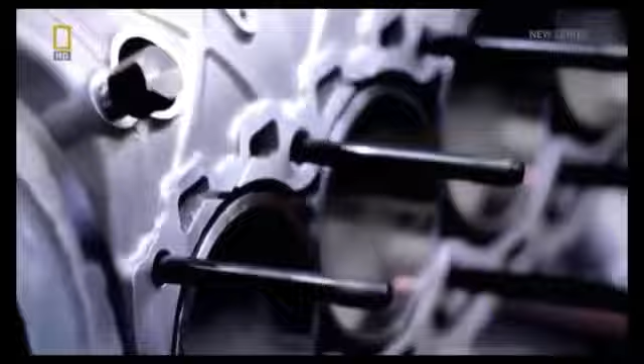The raging bull of Lamborghini has been a symbol of extreme car design and engineering for almost 50 years. But today, as a new age of supercars dawns, the Italian manufacturer has set itself its most ambitious goal yet: to blow its competitors out of the water by creating the best super sports car the world has ever seen, a game-changing vehicle that will alter the scope of supercar design for good.

But this will be no simple reworking of Lamborghini's old flagship models. Its engineers and designers are given the task of starting with a completely clean slate. And at its mega factory in northern Italy, the Lamborghini team has been stretched to its limits to fulfill those expectations. Now, as its latest creation takes to the road, it will be seen if the high-risk strategy has paid off.

Lamborghini has been responsible for some of the world's most iconic sports cars of the past half-century: 350 GT, Miura, Countach, Diablo. The brand has achieved global recognition for its no-holds-barred approach to automotive engineering. Its extreme and powerful machines have placed it among the supercar manufacturing elite for decades.

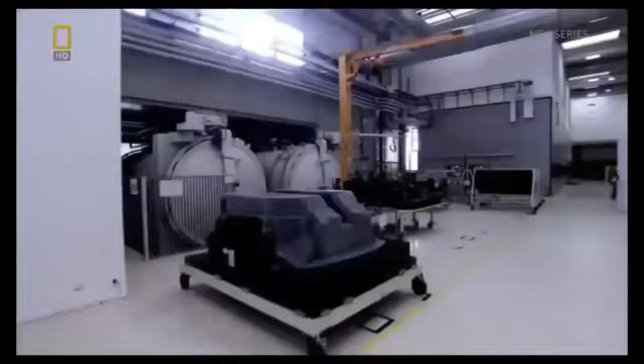Stephan Winkelmann has laid out his vision in a manifesto for the future of the supercar. Now, in our days, it's much more important to speak about the power-to-weight ratio, so the balance between the power of the car and the weight of the car. And for us, in the future, it's much more important to reduce the weight because you get a better feeling, a better driving experience. The Aventador is the first test of this new blueprint.

And the National Geographic channel has been given unique access at the Lamborghini factory to witness the creation of some of the car's first incarnations.

This is Sant'Agata Bolognese, a typically picturesque town in the heart of Italy's Emilia-Romagna district. But it is in fact anything but typical, as it's home to Lamborghini, one of the world's most renowned supercar manufacturers.

The factory is situated in the heart of what is known as Motor Valley in northern Italy. Sant'Agata is intrinsically linked to Lamborghini's success, according to its head of communications, Raffaello Porro. Everybody in the world recognizes our cars come from Sant'Agata Bolognese. And so our factory is a kind of temple where people come, they can say it's a pilgrimage, to visit where those cars come from.

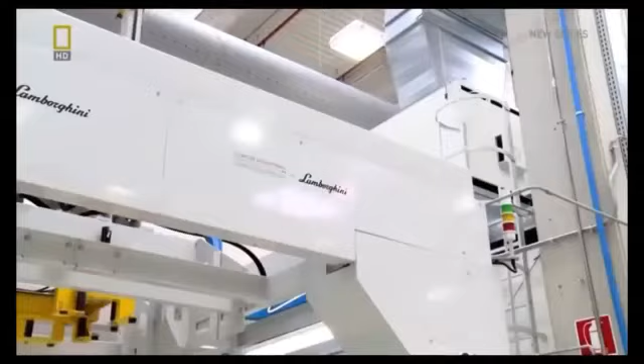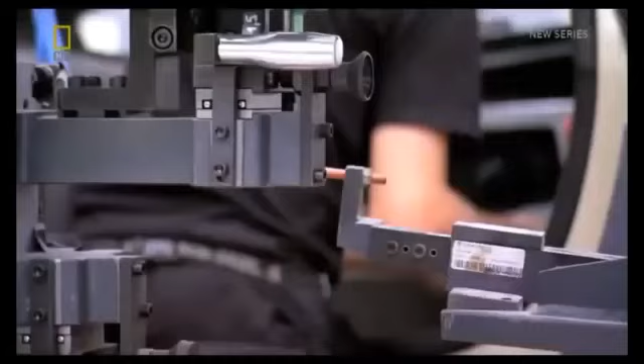The factory has seen many changes over the years, but its purpose has never wavered: to produce vehicles that challenge the status quo. And a largely local workforce is a vital part of that ethos.

They're coming from this region, not even from the region, they're coming from this part of Emilia. We are in Emilia-Romagna, it's the Motor Valley, and this is in Emilia. So a lot of our people are not only living here, they were born here, they are here since generations, and a lot of workers we have in our factory, in our plant, are here at the second generation.

These people are Lamborghini's lifeblood, over 400 individuals working with a singular aim, to produce high-end vehicles that consistently capture the public's imagination.

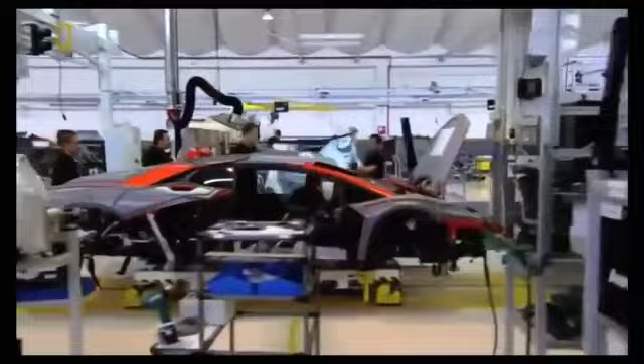In the last couple of decades, a new breed of creative and high-tech vehicle specialists has emerged. Companies such as Pagani and Koenigsegg have set their sights on toppling the most revered names in supercar engineering. Names like Lamborghini.

But it's unlikely that this Italian giant will let its mantle fall without putting up a fight. An attitude embodied in the company's emblem, the Raging Bull, partly inspired by the bravery of Spain's legendary fighting bulls, one of which showed such fearlessness in battle that it was awarded a trophy for its courage in 1993. Its name was Aventador, and almost 20 years later, its legacy lives on in Lamborghini's latest model.

It's Aventador's battling spirit that Lamborghini's development team must channel. In 2007, they're faced with the daunting task of creating a supercar that sets the standard for all others. Maurizio Reggiani, head of research and development, realizes that the only way of doing so is to take a step into the unknown.

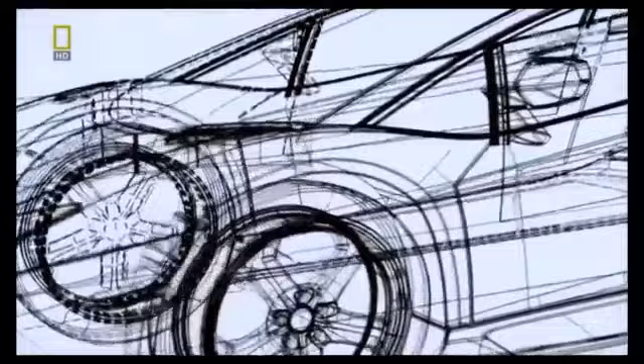To start from a completely clean slate is extremely high risk, and it's up to Reggiani to convince the board that it's the right thing to do. This was one of the hardest things, because the project we were presenting had nothing in common with the old Murcielago, not with anything that existed in production at all. So it really meant beginning from scratch, with all the risks that come with that.

But the board decides the risk is worth taking. At the end of the day, they understood very well, because this is, again, about what Lamborghini is all about: to recreate and to be always revolutionary in the approach.

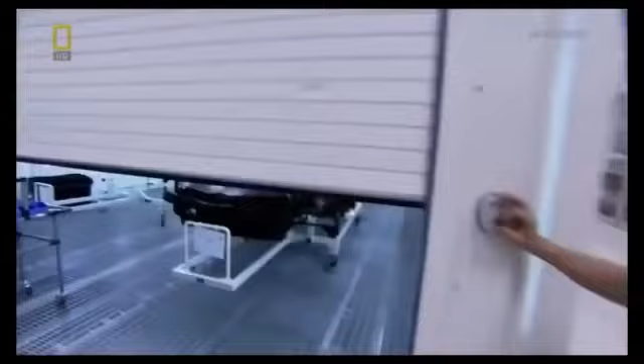The spirit of innovation is apparent in every fiber of the Aventador, as Lamborghini know that the fight to stay at the top won't be won through half measures. And nowhere is that combative approach more apparent than in their focus on lightweight construction, which they've taken to new levels with an entirely new concept for road cars.

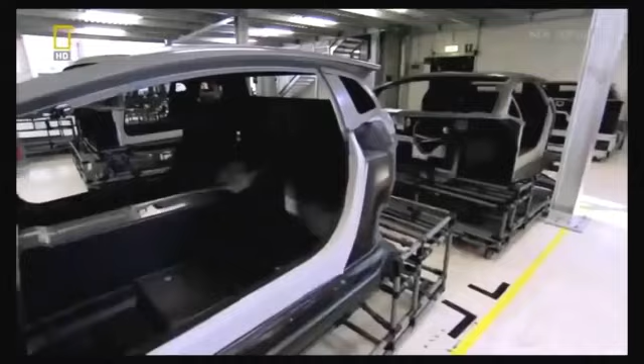A full carbon fiber monocoque. These structures are common in racing cars, but the high cost of materials and laborious production methods have made them unavailable to supercar manufacturers, who've had to combine carbon fiber with cheaper, heavier elements, such as aluminium. That is, until now.

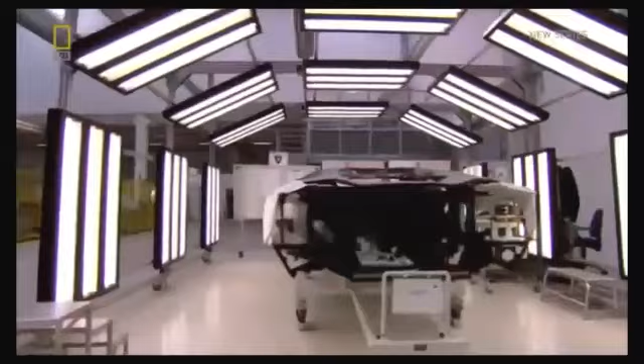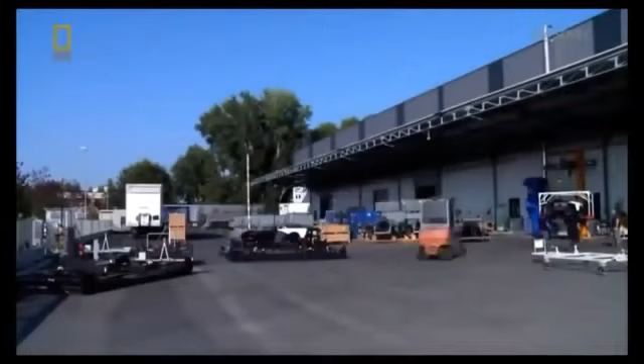The development team has devised a method that allows this race car technology to be mass-produced. But it requires a specialist facility that's up to the task. So in 2009, they build a whole new megafactory just down the road from the company headquarters, devoted to constructing the Aventador's unique carbon fiber body.

Being just 147.5 kilograms, this helps make the Aventador significantly lighter than the Murcielago, considerably improving the all-important power-to-weight ratio, and in turn, the handling.

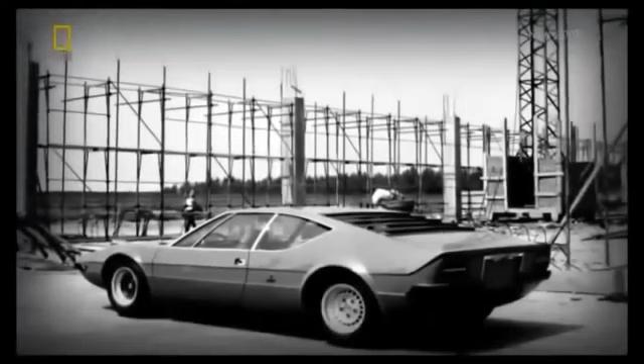Lamborghini hopes that this innovation will stave off the threat by the new wave of rival companies. Lamborghini knows well what it's like to be the cocky young upstart, vying to unsettle the established names, as that's how it began almost 50 years ago.

The man upsetting the status quo back then was the company's founder, Ferruccio Lamborghini. He had made a fortune from a tractor manufacturing business and used some of his money to satisfy his love of sports cars.

According to Lamborghini legend, when he went to Ferrari to critique some of their parts, his views were dismissed. He got a negative response out of some requests he had and proposals to make a better car. And so he said, I will found my own company and I will create the best super sports cars ever.

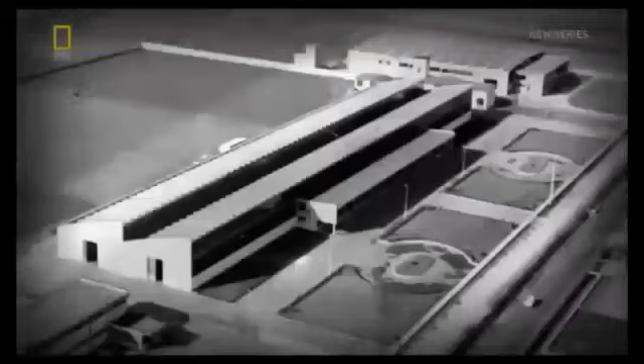He established Automobili Lamborghini in 1963, and for the next few years he toiled furiously to achieve his goal. The cars he created were well received, but it wasn't until the launch of the iconic Miura in 1966 that Lamborghini really made its mark. The tractor maker had succeeded in breaking into the exclusive world of supercars with his bold new enterprise.

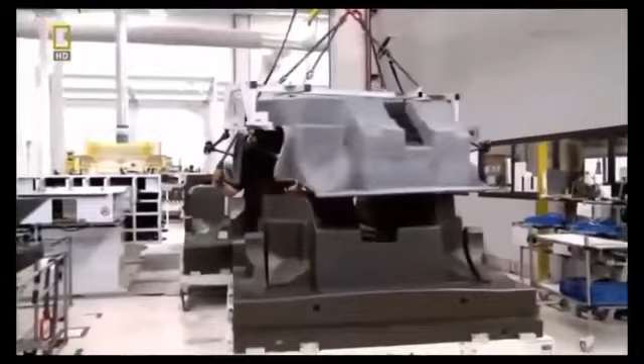Almost 50 years later, despite having joined the ranks of well-established sports car manufacturers, the company still strives to be edgy and uncompromising. As demonstrated by its approach to the area it believes will define the future of sports car engineering: lightweight carbon fiber construction.

The company's relationship with carbon fiber goes back as early as the 1980s, when it created the Countach Evoluzione, a concept car which experimented with the use of composite materials.

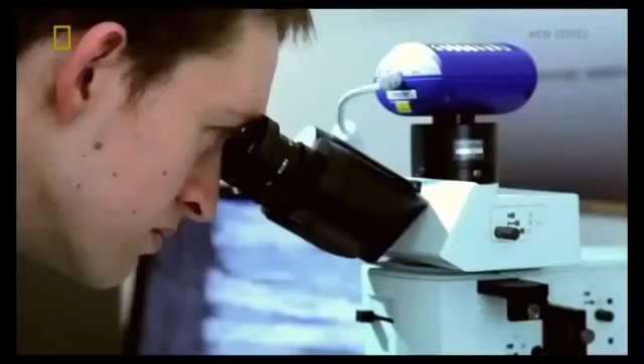It was dreamt up by the newly formed Composites Department, whose successor has made many inroads into research and development of lightweight composite materials. And discoveries made here mean that next door, the company has been able to construct its new carbon fiber production facility.

The man given this task in 2009 is Ranieri Niccoli, Industrial Director. And he must devise it completely from scratch.

So, when we design and we build this factory, we didn't have any automotive benchmark. We were the only one in the automotive business to build and to run this kind of technology.

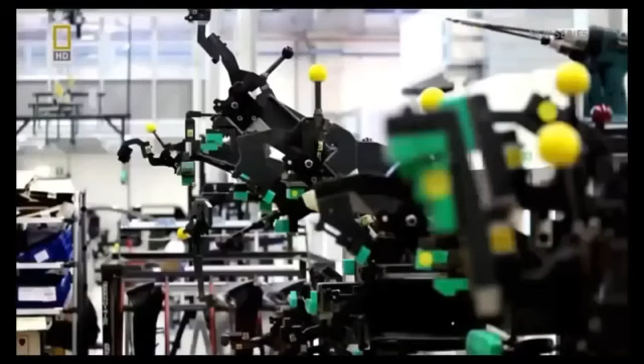So they have to look elsewhere for inspiration. So we look to other sectors, for example, the aeronautic sector, then we adapt and we modify their process to a Lamborghini production system in order to build our car.

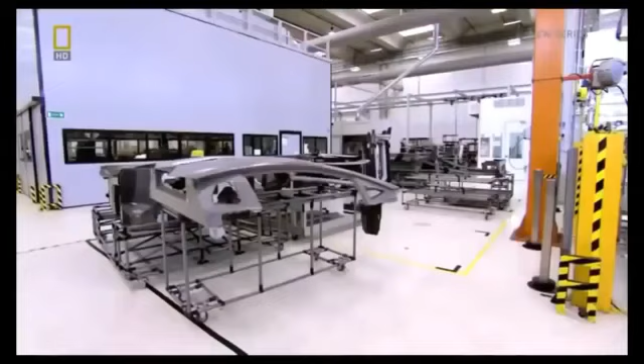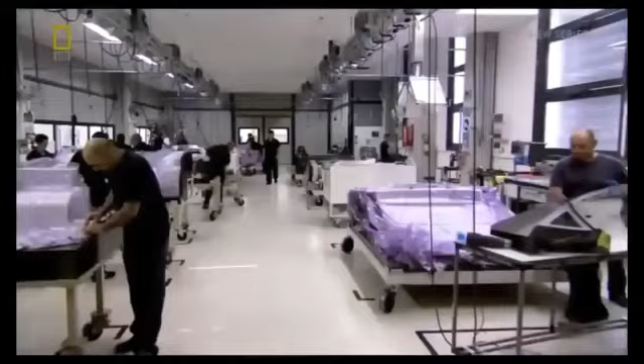The result is 500 square meters of new production space, known as the CFK, devoted entirely to sculpting the Aventador's super lightweight monocoque. Here, 146 carbon fiber specialists toil day and night to create 4 complete monocoques every 24 hours.

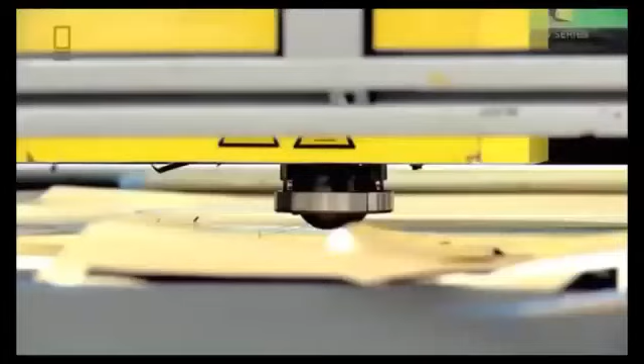To achieve this target, engineers have developed a unique production system. All materials are first cut by an automated machine before being sent for preparation. The material is placed into molds and laminated in a vacuum bagging process which forces the layers into shape, before being cured in a large pressurized oven known as an autoclave.

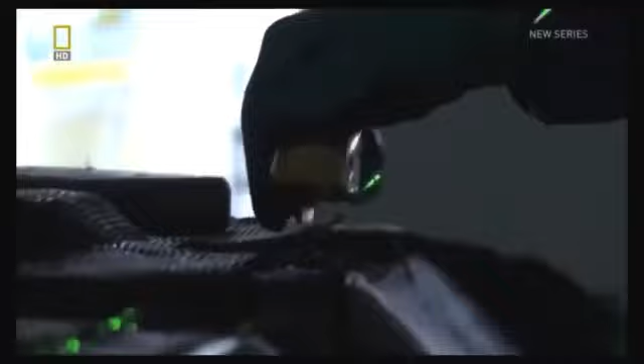Meanwhile, the production of other parts of the monocoque is underway, as operators fine-tune and cut more layers of carbon fiber with the assistance of precision lasers. A special oven is used to inject resin into the carbon fiber mats, which transforms them from soft sheets of cloth-like material to a strong, rigid structure.

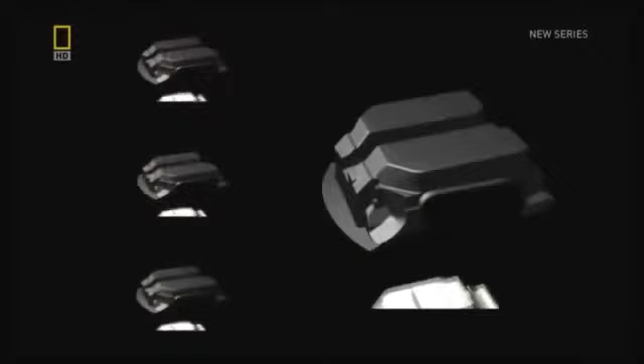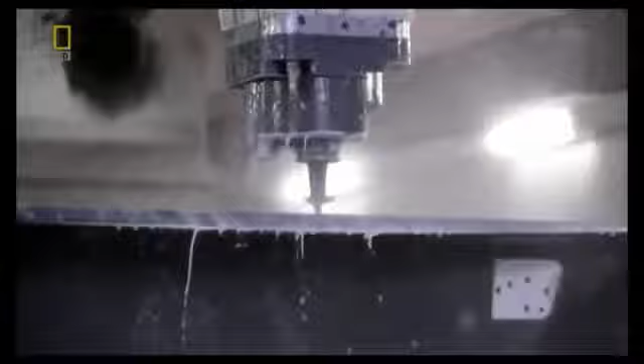After all these processes are over, the two key sections are finally recognizable: the base section, known as the tub, and the roof. They're placed in an automated machine, which drills them with holes allowing for attachments to be made later.

Throughout the factory, computer-controlled machines share tasks with human specialists, a partnership that's integral to the Lamborghini production process.

The main priority of our plant was to follow the Lamborghini production system, so with a high degree of craftsmanship, high degree of skill, people, combined with a technology, with automatization process. This was the main challenge that you can also see in our plant.

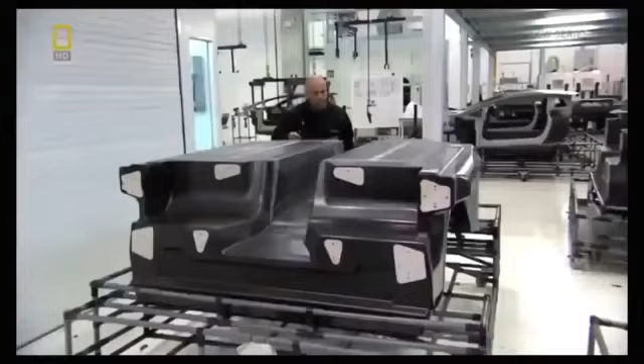Aeronautic-inspired engineering is ingrained in many aspects of the Lamborghini CFK production process, such as this stage, known as the Harmony Hammer Test. In this quality control test, an operator strikes the monocoque section with a specially designed hammer and allows it to vibrate, listening out for areas where air might be trapped in the carbon fiber shell.

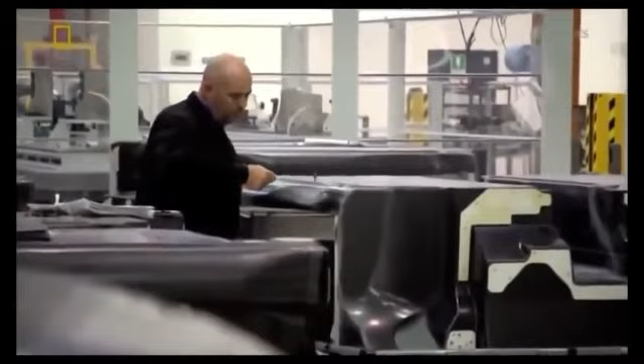Once checked, the parts are ready for their union as the tub and roof are glued together, turning the monocoque into a single entity. It's essential that the two parts of the monocoque are exactly aligned, so workers use a robotic arm with a 3D laser attachment to check that the sections have been coupled correctly.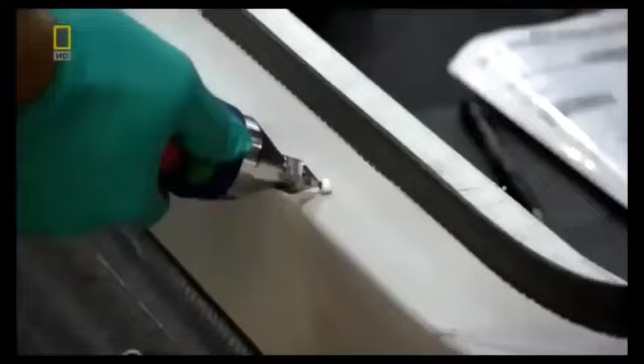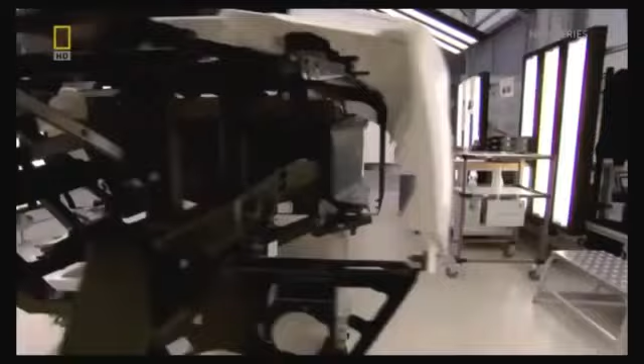Once the correct dimensions are confirmed, metal sections are manually attached to the monocoque and the body is complete. Then it's into a light tunnel where surfaces are quality checked to ensure they're in pristine condition before the Aventador's body is signed off for release.

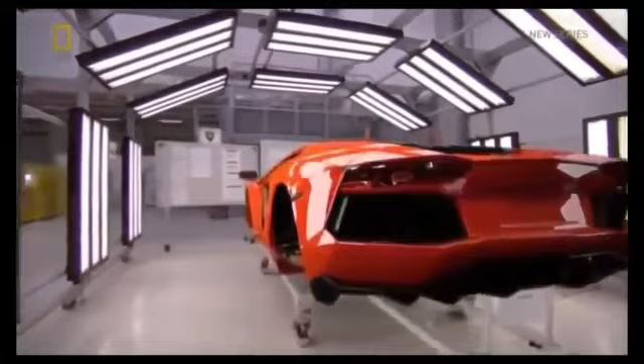As the body is ready to leave the carbon fiber plant, it's possible for the first time to see the Aventador's unique geometry taking shape. This extreme design is one of the most recognizable aspects of the Lamborghini DNA, and it's a tradition maintained and pushed forward here, at Lamborghini's design center, or Centro Stile.

The generational leap required of the Aventador does not stop with its engineering capabilities. The look of the car is integral to its ambition.

The design of Lamborghini always has to be revolutionary. Yes, you have to understand, if you see a car in front of you, this can only be a Lamborghini even if you don't know the model. So it's very tough for our designers because they have to create something new, but recognizable at the same time.

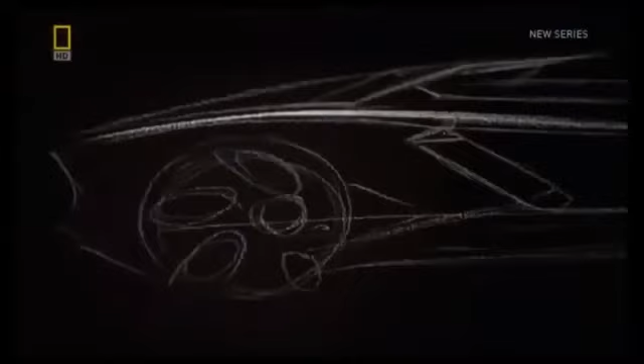The job of the design team and its chief, Filippo Perini, is made even tougher during the earliest phase of the Aventador's development, when the board forces them to compete with outside companies to earn the right to design the new model.

And at one point, victory comes close to slipping through their fingers.

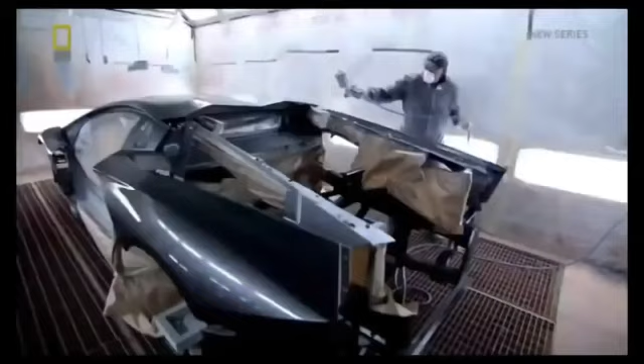After the CFK, it's taken away to be given one of its most important characteristics: its color. Here at the paint shop, it's lavished with the kind of attention that most cars could only dream of.

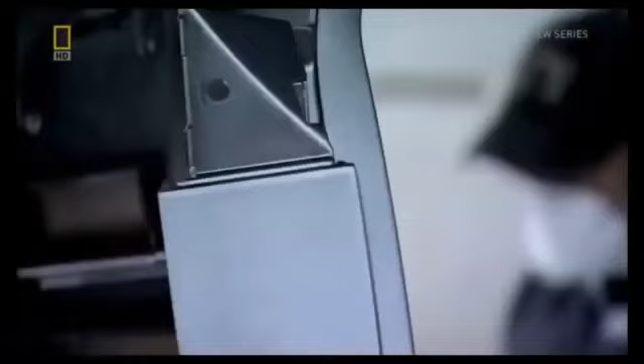One of 13 colors are hand-sprayed over every part of the bodywork. 27 pieces are given individual attention by a specialist, who covers them with 8 liters of paint. The Aventador, with its extreme lines, requires more man-hours than any other Lamborghini in the past.

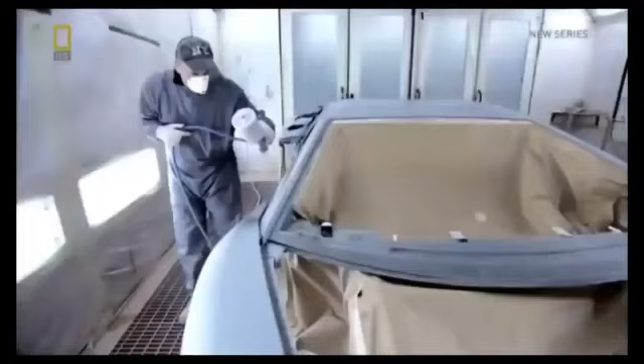And of course, every phase is carried out manually, as only human analysis and dexterity can ensure that each surface is covered with exactly the right amount of paint.

In total, 200 man-hours are spent on every single Aventador while at the paint shop. 3 whole days are spent on polishing alone. After being carefully sanded, the Aventador is repeatedly buffed with special materials.

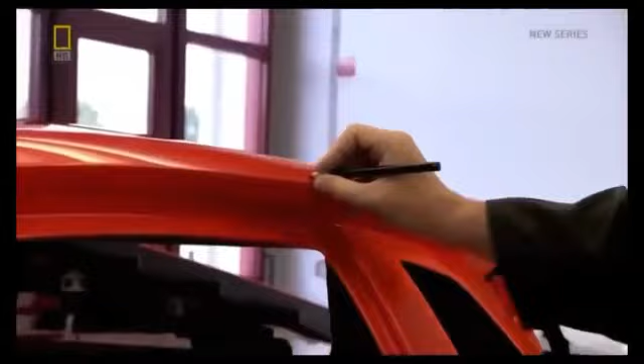After that, it's sent for another quality check in a light tunnel. For 2 hours, an inspector walks around the bodywork, checking for color perfection. If there's any inconsistency, the offending section will be sent back to be repainted.

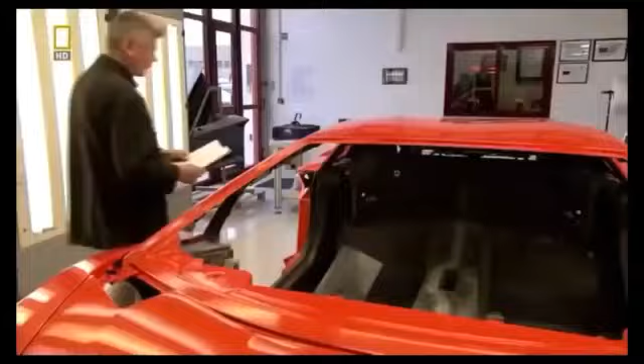Underpolished areas are also marked out for extra attention. These hundreds of hours of devotion end when the exacting standards of the inspector are met, and the car is released for the next phase of production, the assembly line.

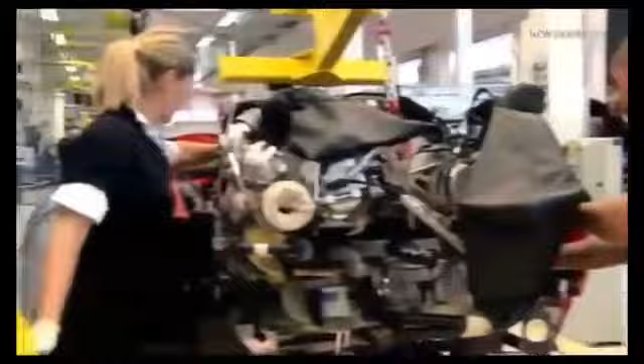The assembly line for the Aventador lies just meters from the original site of the Lamborghini factory, built almost half a century ago. Back then, its founder, Ferruccio Lamborghini, was known for his hands-on approach, frequently seen on the factory floor, directing operations. He focused on the skill of the mechanic as being key to the success of the product, and that attitude still permeates the site today.

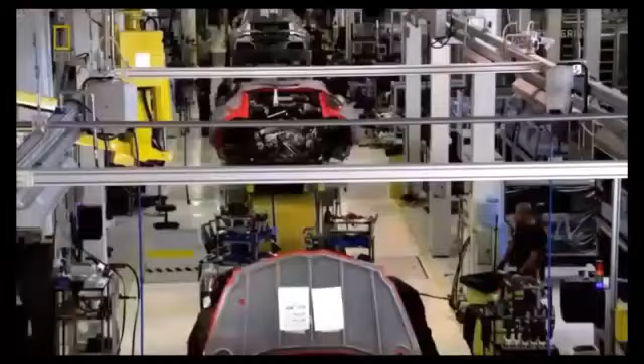Here, 50 workers spread over 11 workstations are responsible for the task of assembling Lamborghini's latest model. The man in charge of making sure things run smoothly is production manager Andrea Costantini. He sees his highly trained workforce as a direct link with the roots of the company.

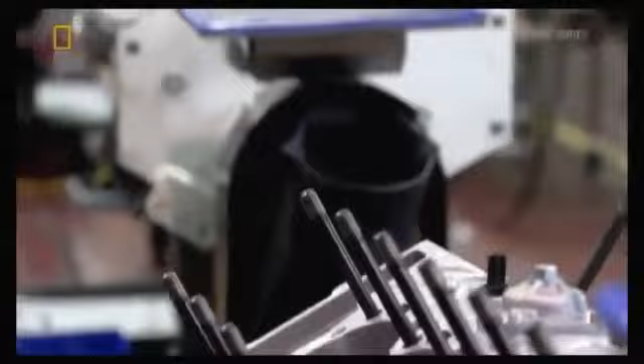In this case, the workers are the most trained. We take these guys directly from the best schools of mechanics in Emilia-Romagna, here, the surroundings of Lamborghini, and we train them for more than 2 years to allow them to be really the best experts on mechanics and engines. So everything is done manually, still like we did since 1963, since when Mr. Ferruccio Lamborghini, the owner of Lamborghini, started.

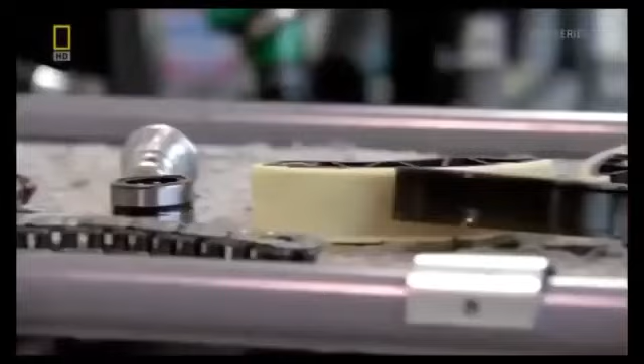In an age when machines dominate production in almost every field of manufacturing, loyalty to the art of skilled manual labor is not often seen. But here it's believed that when it comes to reliability and precision, humans still have the edge over machines.

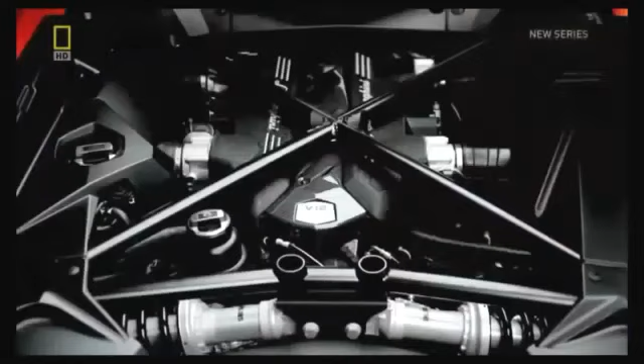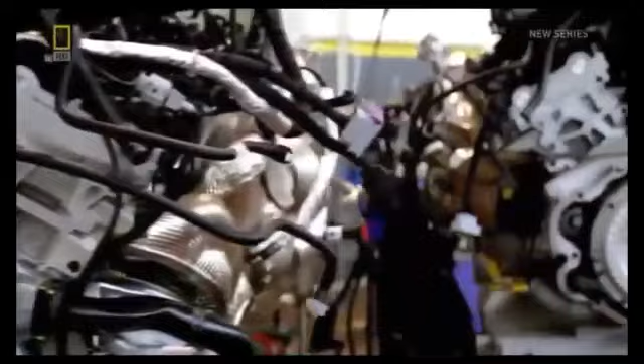And nowhere more so than in the engine assembly station. For this is where the heart of the Aventador is put together, the Lamborghini V12. At a time when many sports car manufacturers are shying away from using the 12-cylinder engine, Lamborghini is resolute. The V12 always has and always will provide the power for their flagship models.

The V12 for Lamborghini is part of our DNA. Everything for us is rooted in our history, which started with the 12-cylinder engine.

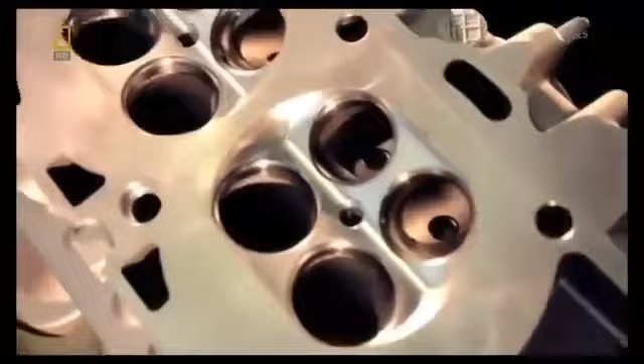With 6.5 litres of displacement and 700 horsepower, the Aventador's V12 is about as gutsy as it gets. But as with everything else, it's had to move with the times. Lightweight, again, is the order of the day. And despite the fact that this engine is more powerful than the Murcielago's, it weighs less, just 235 kilograms, by using aluminium silicon alloy on components such as the crankcase.

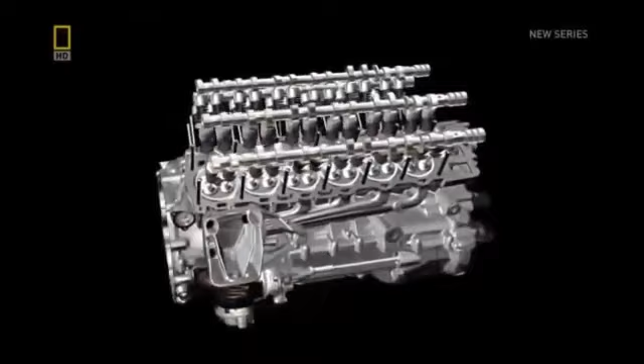The main purpose of the V12 is to power the Aventador, but when linked with the car's exhaust system, it takes on another significant role. Creator of the mighty Lamborghini Orchestra.

The V12 motor represents what for us is the sound, the music of the car, the way in which it's presented to the public, the way she makes herself heard and announces her arrival. To achieve this, we invest a great deal of time in simulations. We simulate the sounds that we can have, and then we experiment first in the lab and then on the vehicle itself.

This 12-cylinder symphony has a full range, from a moderate rumble through the town at low revs to the screaming crescendo of maxed-out gear shifts.

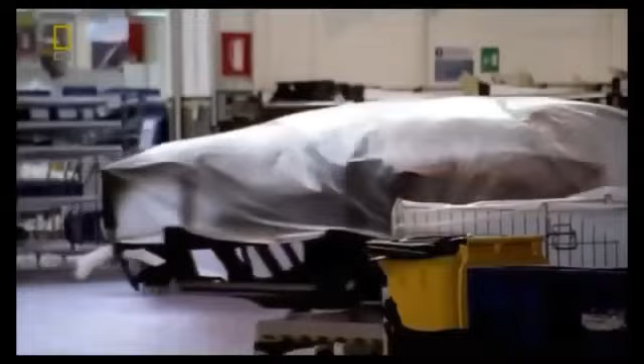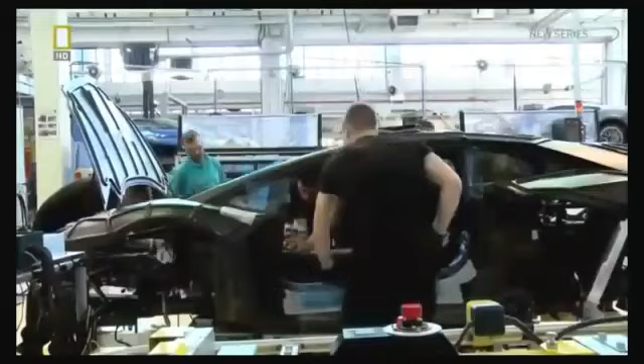While the V12 is being assembled, the body of the Aventador arrives on the assembly line, ready for conversion from an empty shell into a fully functioning supercar. As the company's latest foray in a highly competitive market, the Aventador needs a production process with efficiency to match.

The drive for improved efficiency was for sure coming from the market, from our competitors. We have always to be the best, to be the number one in terms of product, in terms of performance, but also in terms of quality. So to become and to stay number one, we have always to have a huge increase of efficiency, a huge increase of quality in the assembly line and in all the processes inside the factory.

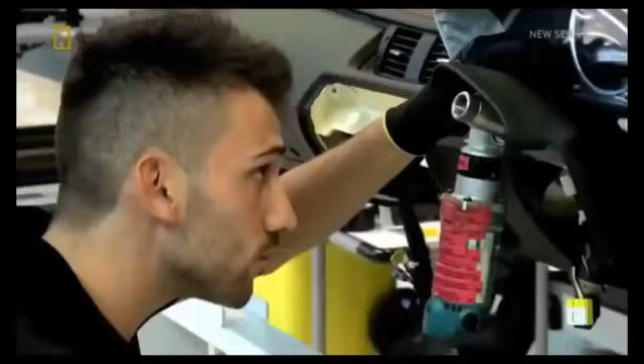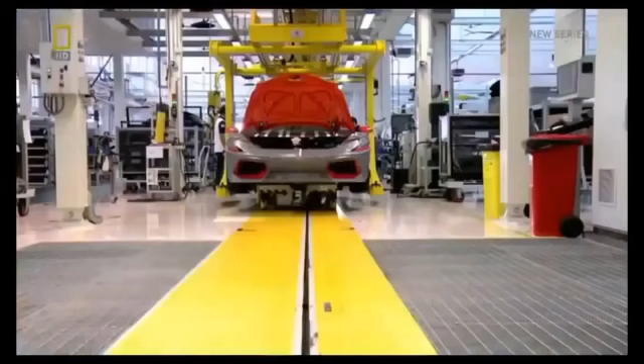The company's output of luxury vehicles is a mere fraction of what the large-scale manufacturers produce for the mass market, with around 800 Aventadors due to be created in the first year. But that doesn't mean the factory can't be run to similarly exacting standards of efficiency as the largest groups. Workers have just 1 hour and 40 minutes to carry out a whole range of highly meticulous tasks. If they take too long, the whole assembly line will stall, targets will be missed, and costs will mount up.

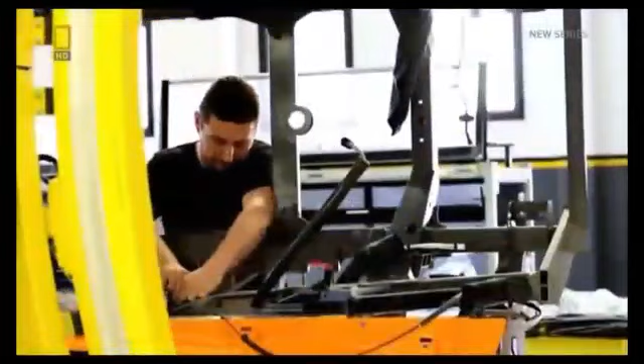The countdown starts here, at the first station. Work is carried out on the underbody and front differential by lifting and rotating the vehicle to give the mechanics easy access.

Before being readied for what is arguably the most significant stage in the Aventador's production: the insertion of the colossal V12 powertrain into the car's chassis.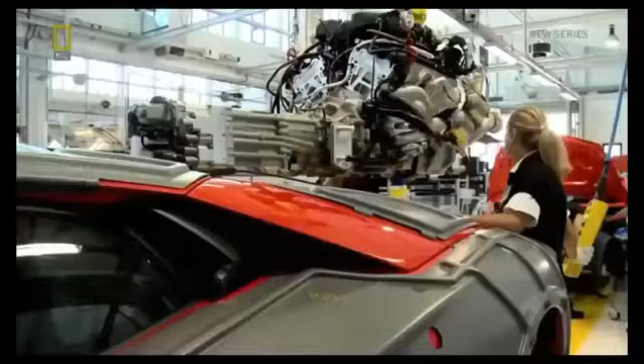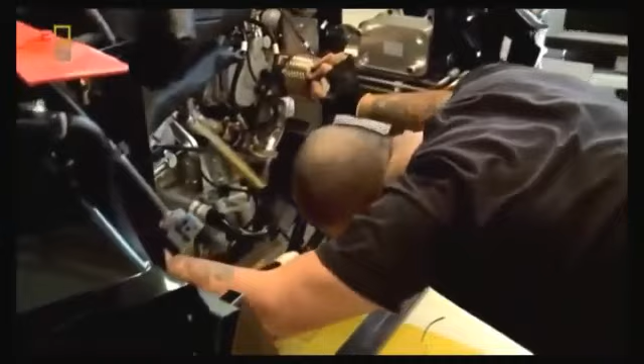Here we are in the most critical assembly station of the Aventador assembly line. Here we have the assembly of the engine, the heart of the car, basically inside the body in white. We call it the marriage between the car and engine. This marriage of elements is when the development team's work of the past 4 years comes together, where design and engineering combine.

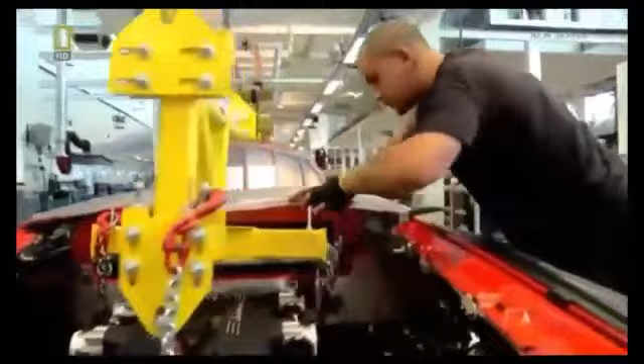Here, as with all other phases of production, the specialists of each station take full responsibility for their section. You can see the workers assign each and every single connection to be sure that each and every phase was done in a good way. The risk in this case is the car is not working properly after or during the road test, and could be a big problem for a customer using it. As you can see, this is absolutely not done with equipment, a robot, or other automatics, but is done manually.

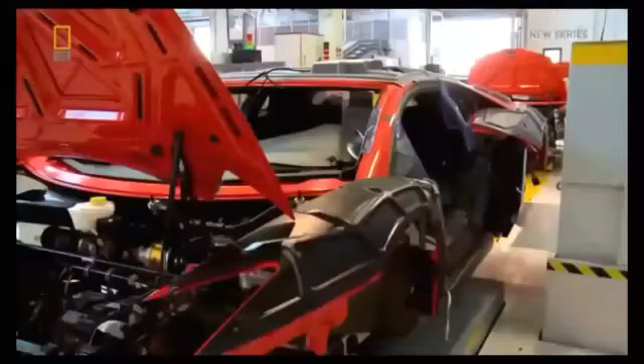Step by step, the car is taking shape, being molded from empty shell into the fully formed supercar that will leave the factory.

And while the assembly line is in full flow, next door, the second critical aspect of the Aventador is being prepared: the interior. It's in this sector of the factory that a customer's individual preferences for the way their car looks can really be indulged.

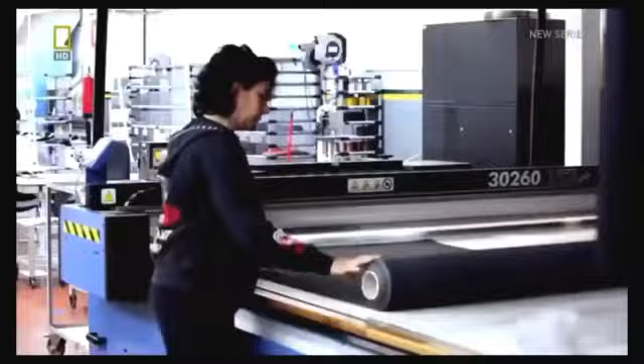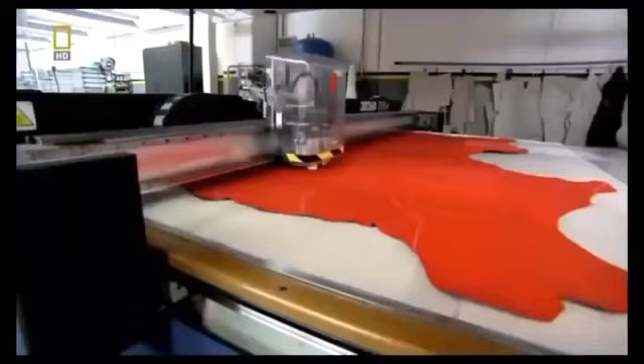About 100 square meters of leather hide in 9 different colors arrives each day. Attention to detail is essential to pass the stringent quality control checks. Here, a leather specialist looks for minor imperfections in the hides and marks them up wherever found. An automated machine recognizes the marks and cuts around imperfections, leaving only pristine material for the Aventador's interior. The leather is then taken to specialists with 3 years training to be stitched and glued onto the various parts that make up the Aventador's interior.

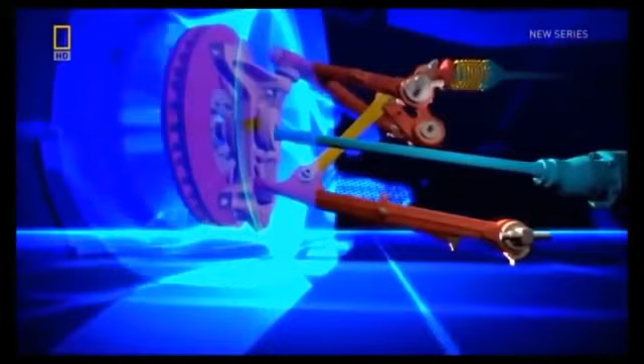Back on the assembly line, one of the Aventador's most important pieces of kit is ready. This simple-looking item is the suspension, but its apparent simplicity belies the creativity that goes into its engineering. The Aventador uses a pushrod suspension system direct from the world of Formula One race cars. It works by keeping wheel control and damper elements separate. By keeping the damper elements inboard, the pushrod system allows the wheels to maintain maximum contact with the road when going round bends, massively improving the handling on corners, a must for a car that can hit speeds of up to 350 kilometers per hour.

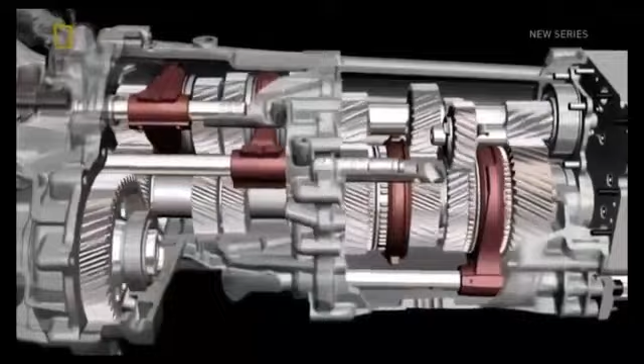But it's what's happening away from the eye that's most remarkable: the Lamborghini patented independent shifting rod transmission. This technology allows the shifting process to run virtually in parallel. While one shifting rod is disengaging one gear, the second shifting rod can already engage the next gear, creating a shifting time of just 50 milliseconds. Not far off from Formula One transmission times, which average around 30 milliseconds.

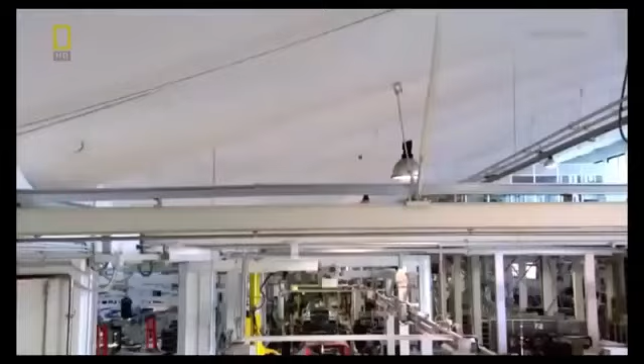Such technological innovations are only made possible by extensive testing of the vehicle during the development phase. And possibly the most critical moment for the engineers is when the prototype model takes to the track to be put through its paces for the first time. For the Aventador, this happens back in 2008.

Then we found ourselves at the first track run of the Aventador, which generated an indescribable emotion. At night, on the Nardo track, a small group of people seeing a creature move for the first time that had needed years and months, nearly a year and a half, before it was able to move. And the perception, after these first laps, based on what our test drivers told us, was that we'd created something that really was the new landmark for super sports vehicles.

The man behind the wheel of that prototype Aventador was Lamborghini's chief test driver, Giorgio Sanna. He's been a key member of the Lamborghini development team since 2001. A dream job for many, but the thrill of driving prototype supercars comes with certain pressures.

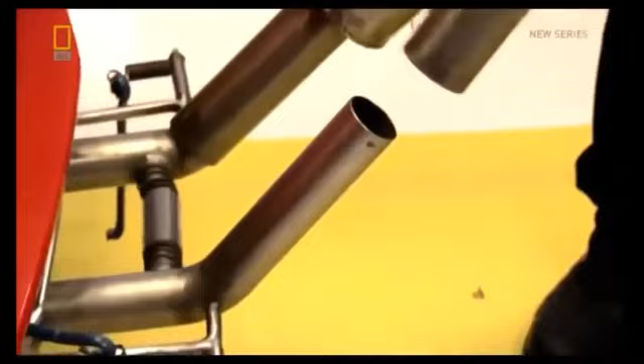As important as the assembly process itself is the series of quality control checks that the car must undergo once it's complete. Any minor imperfection could impact on the car's performance, and its safety elements in particular must be rigorously tested.

The brakes are checked in a room where the car is driven at speeds of up to 140 kilometers an hour on a rolling road. The Aventador's carbon ceramic brakes can take it from 100 kilometers per hour to a complete standstill within 30 meters. And in theory, the Aventador is capable of going from 0 to 100 and back to 0 in less than 4 seconds.

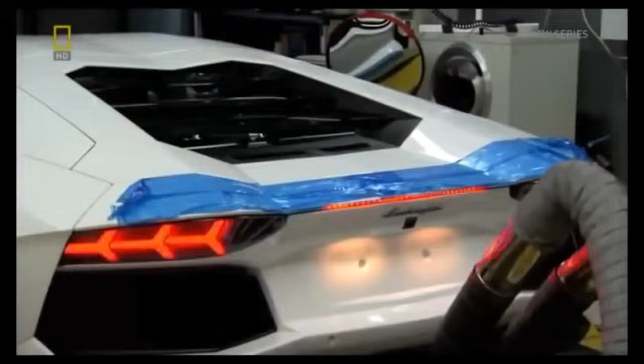Data from the anti-lock brake system is transmitted wirelessly to two dishes, then into a computer mainframe for analysis.

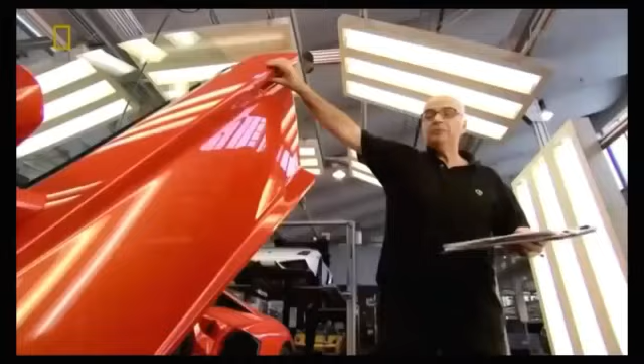The final task of the factory workers is to scrutinize the car in a light tunnel to ensure that aesthetic standards haven't been affected during the assembly process. But before it can be shipped to whichever global location it's destined for, each Aventador must undergo one final phase: the all-important road test.

Every car is given its own test drive around the local area. They're put through their paces to check that their complex engineering is absolutely in tune. And it's here for the first time that the cars are enjoyed as they were intended to be. Only once the test driver is satisfied that all aspects of the Aventador have been properly configured will he sign it off for release to the outside world.

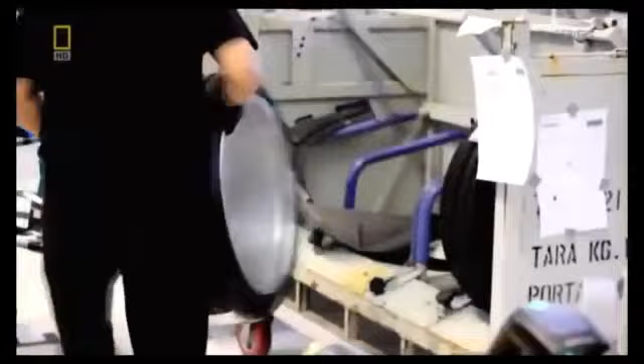The Aventador has come a long way since the brief was first given for its creation in 2007. Years of struggle from designers, engineers and mechanics have culminated in a vehicle which looks likely to remain as Lamborghini's flagship model for some time to come. The risk of starting completely from scratch has paid off. And with the new era underway, complete examples of the Aventador are rolling off the assembly line at a rate of 20 each week.

But for Lamborghini, the challenge does not end here. As the company celebrates its 50th anniversary in 2013, it will be thinking of new ways in which it can push the boundaries of automotive engineering. Stefan Winkelmann suggests that a different era might be around the corner.

Our two-model strategy for the future will not be enough, so we decided to step into a third model. It will be a Lamborghini which you can be able to drive every day, so a very usable Lamborghini, but it will always have the DNA of the true Lamborghinis inside.

A Lamborghini for everyday use may be on its way. But until then, the Italian supercar manufacturer will focus all its efforts on producing vehicles which aim to keep them ahead of the competition. And right now, the car leading that charge is the Aventador.